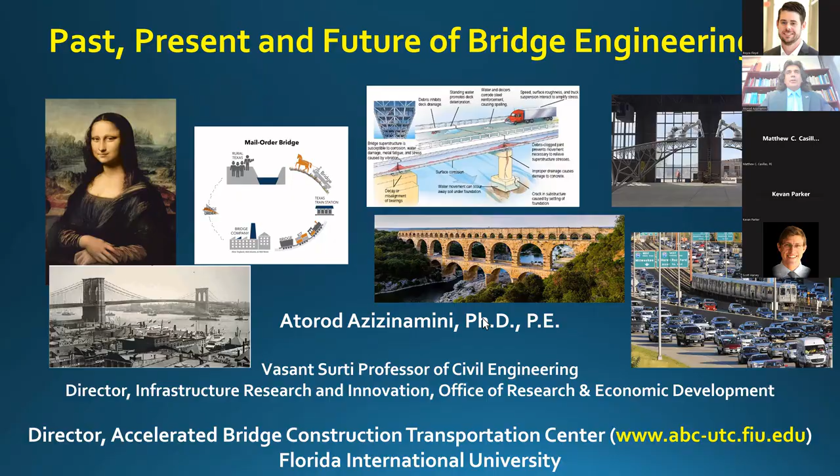Let's go ahead and start. Building bridges goes back many hundreds of years.

Sometimes we say, like the Pont du Gard bridge in southern France, has lasted for centuries, and the thought is that we really did a much better job in the past. But don't forget that for every bridge constructed centuries ago that's still standing, there are thousands that did not stand the test of time.

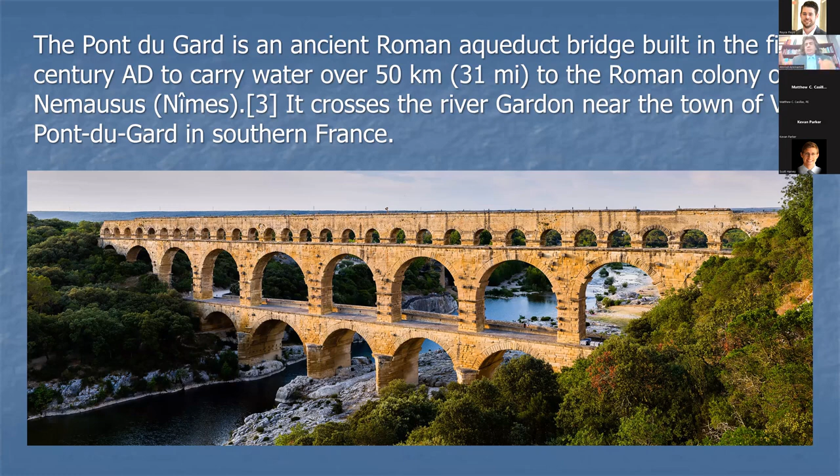Nevertheless, bridge engineering has been fascinating over time, with lots of innovations. I admire the innovation that went into bridge engineering when there was no steel. The arch shape you see was used because at the time there was no material that would take tension, so they had to use an arch because it resists compression. That's why the structures are so massive. You see this same type of structure in old churches in Europe, the Middle East, and elsewhere, because there was no material that would take tension.

I put this slide here, and I'm pretty sure some of you are going to say Atorod is out of his mind - why does he have the painting of the Mona Lisa by Leonardo da Vinci? Well, some of you know Leonardo da Vinci was probably the most famous contemporary figure, one of the first contemporary civil engineers of our time.

I remember I had the opportunity to be in Milan, Italy. If you go to Milan, there's a good museum with the works of Leonardo da Vinci. He was a Renaissance man, and what he did and the inventions he had are really amazing.

He had to make some money, so part of his life he joined in making military equipment, coming up with inventions like a tank you would go inside of and hide in to fight the enemy, and so on. There are so many things credited to him - some say the bicycle was even invented by Leonardo da Vinci, others say no. Many things underwater too, like scuba diving equipment. He has some amazing inventions, but one thing he was for sure was a civil engineer.

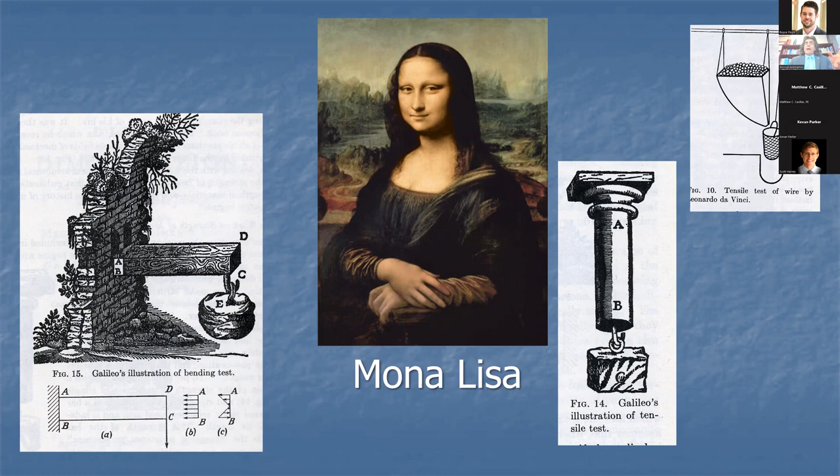Our first civil engineers, when they were inventing something, were always worried about strength. Now, people like John Roebling, who designed the Brooklyn Bridge, were actually thinking about service life too, and I'll mention that. But back then, we really weren't worried about that, and rightfully so - we didn't have heavy traffic and so on. So the early days of bridge engineering didn't have many of the parameters we're concerned with right now.

One thing I should mention is that originally, civil engineers were mainly worried about strength. If you look at the ACI building code, or the AISC building code, there are lots of provisions for strength. And I'm mentioning that because many provisions in our AASHTO LRFD bridge design specification are really rooted in the building codes for steel and concrete. For buildings, strength is fine because every element is protected and you don't have that much of a durability or exposure problem. But in the case of a bridge, it's something else.

One of the reasons it seems like every day we are developing a new AASHTO guide for this or that is because we have taken many items from the ACI and AISC building codes, which are rooted in strength, but durability is what really gives us a hard time - corrosion and so on. Those issues are not really addressed through strength. They should be addressed through life cycle performance, long-term cyclic behavior, exposure to weather elements, and so on.

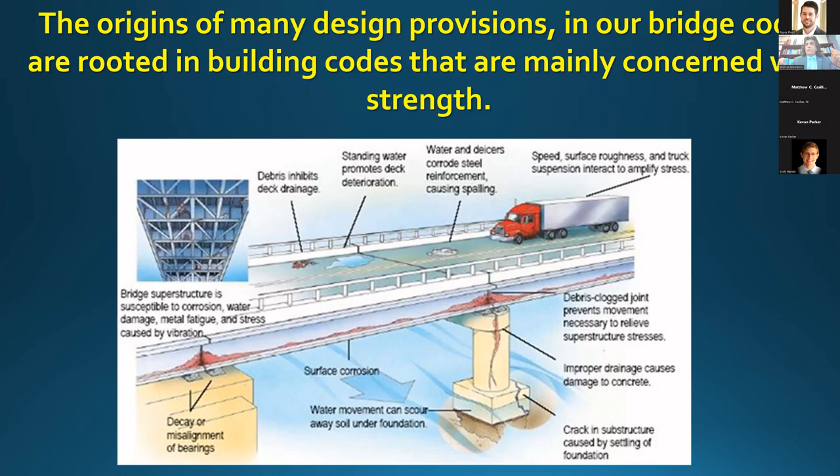But despite all that, there are some bridges that did last more than 100 years. I'm going to show you some of them, and I put the age as well. The Brooklyn Bridge is 140 years old, as of today.

This bridge was designed by John Roebling. Actually he was a very smart guy, and he used graphite to protect the steel cables.

One side comment, one observation as I look at the past, especially in bridge engineering or any other scientific area: you find people who are engineers, mathematicians, philosophers, poets, painters. Look at Leonardo da Vinci - the Mona Lisa painting - but then he also thinks about civil engineering problems. I think as time passes, we've tended to become more specialized in different areas.

But some of the old bridge engineers like John Roebling, who designed the Brooklyn Bridge, were really thinking outside the box. He was thinking ahead - he knew that corrosion would be problematic. So he used graphite, and that protection lasted a very, very long time.

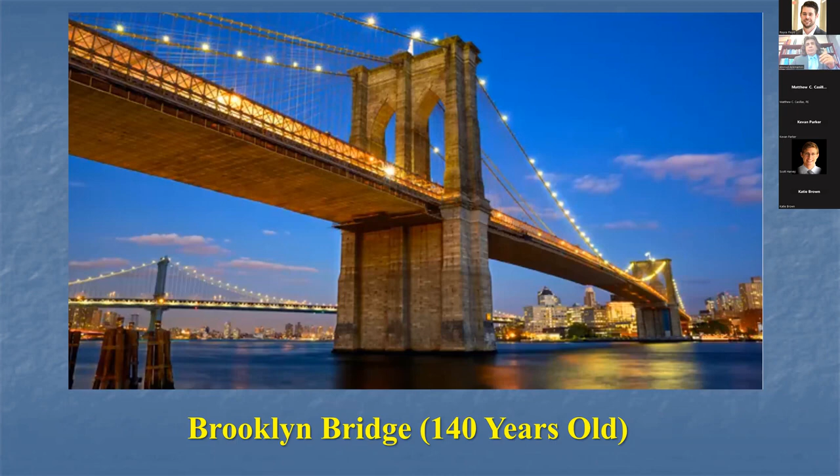The Williamsburg Bridge was not as well maintained, and I believe in 1988 they had to close it. They were trying to decide what to do, and finally in November 1988, after closing it in October, a group got together to decide whether they should replace the Williamsburg Bridge or continue with it. The decision was, because of its historical landmark status, to go ahead with rehab. I believe the major rehab started in 1991.

Now, one item for this bridge that really catches your eye is the fact that these cables were originally designed with a very large factor of safety - if I'm not mistaken, about 5. Over time, the factor of safety decreased, but it was still good enough to serve the type of traffic it has nowadays. That's another lesson: other than maintenance and rehab, it's the very high safety factor that went into the design of bridges like the Williamsburg Bridge, which had a safety factor of 5 for the cables. Over time it decreased to maybe 2.5 or 3, but it's still good enough to meet current criteria.

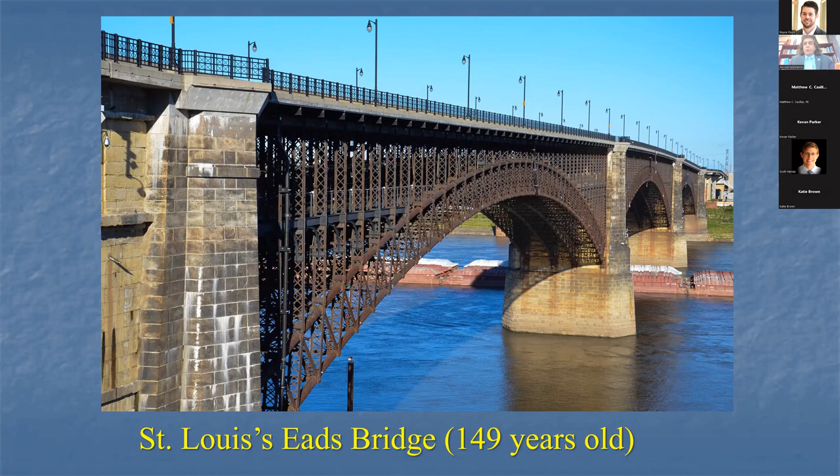I think another reason is the very heavy substructure that you see down here, very stocky. I think that also had something to do with the fact that these bridges have lasted so long. So anyway, we do have bridges that have lasted a long time.

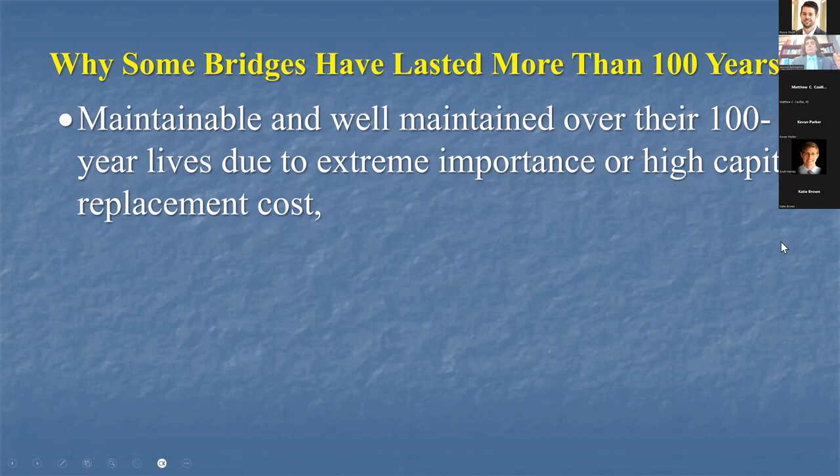But if you look at it, really a couple of things jump out. One is that the reason they've lasted more than 100 years is that they have been maintainable and well maintained over their 100-year service life. It's not without the maintenance. So the maintenance really plays a big role.

The other thing is that it's been adaptable to changing function, use, as well as the service limit state demands, because of basically the size and the weight and so on.

And finally, it was originally over-designed, just like the Williamsburg Bridge that I mentioned, where the safety factor originally for the cable was 5, but then over time it decreased. Now, the designer did not do a good job in protecting the cables. In the case of the Williamsburg Bridge, like the Brooklyn Bridge where John Roebling used graphite, they used some type of oil for the Williamsburg Bridge instead.

But these are really the three main reasons, if you want to identify why some of the bridges we have have lasted 100 years. Those are the reasons, basically.

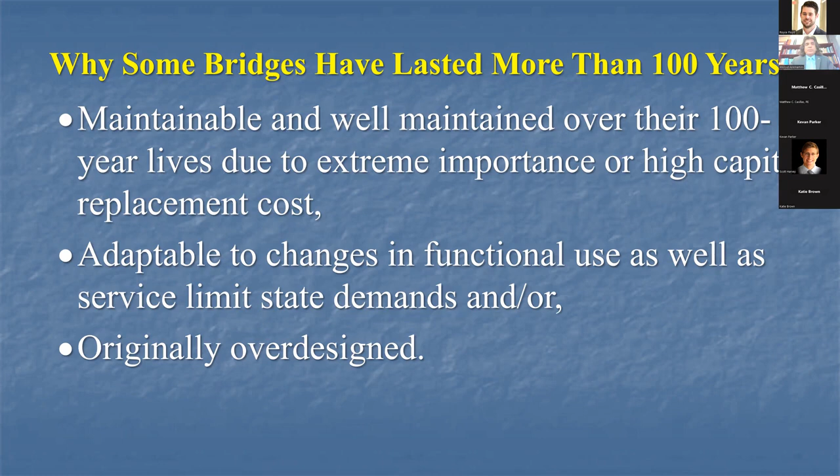The other thing is, in the past, history repeats itself. If you ever think that accelerated bridge construction was invented by us, think twice. I think some of you probably know, back in the old days, before having a proprietary bridge system became a no-no -- I'll elaborate on that in a minute.

Back in the old days, there were salespeople that would go from county to county with catalogs. They would go to these counties and show them pictures of these bridges, and then ask, okay, which bridge do you want? For example, this one right here is out of a catalog.

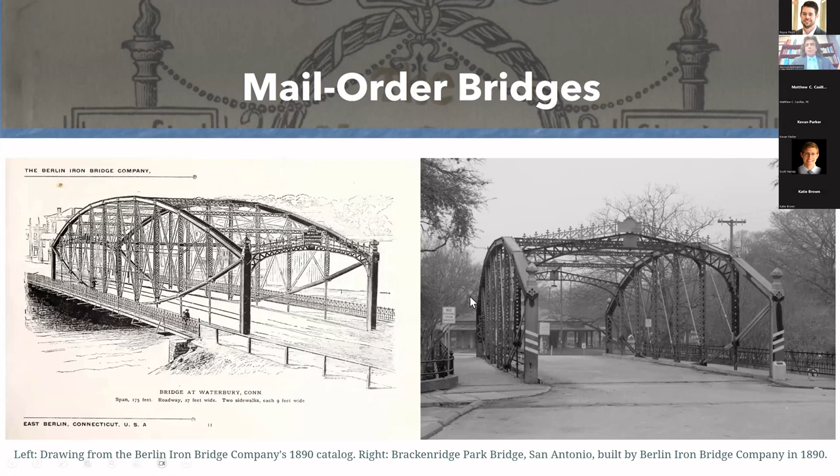I took this from a publication by the Texas DOT, and this is an actual bridge, okay? This is how it worked, basically. The salespeople would come, you would look at the catalog like a Sears catalog, and you would decide what you want.

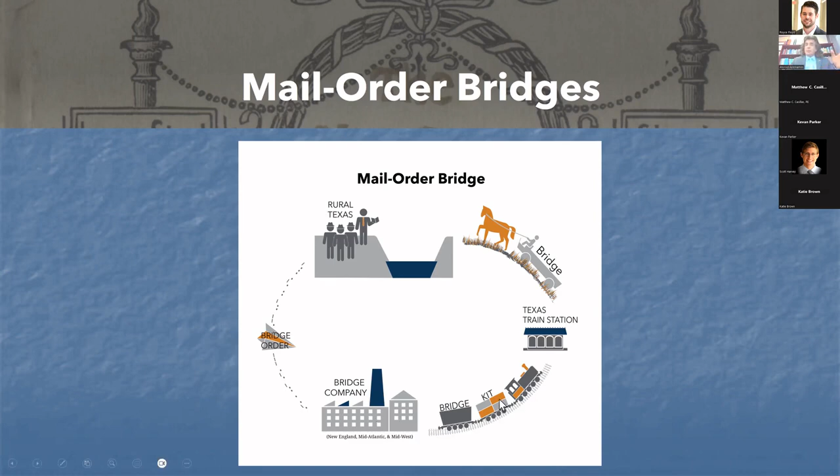They would take your order, go to the company -- there were some companies in Ohio, Pittsburgh, mainly in the Midwest and the East Coast -- and then they would ship the parts and assemble it for you. Here is actually one of the fabrication shops where the bridge elements, the truss, was being fabricated.

One side item really is, if you look at the old history of bridge engineering, you see that there were so many patents issued back then -- Warren Truss, Pratt Truss. These are people who invented these systems, put their name on it, and sold them, and it was not a problem.

I believe there was a law passed in 1975. I don't know what the name of the law was, but I know there was a law passed that really put an end to those innovations. Look at the number of innovations that has gone into the phone system -- today, for example, on a cell phone there might be close to 800 or 900 patents, basically, and that's how it evolves.

Basically, with the patent, there is improvement that comes in and so on. But in the case of the bridge, really, we decided in 1975 that we don't want a proprietary item. That's I think where the innovation really stopped.

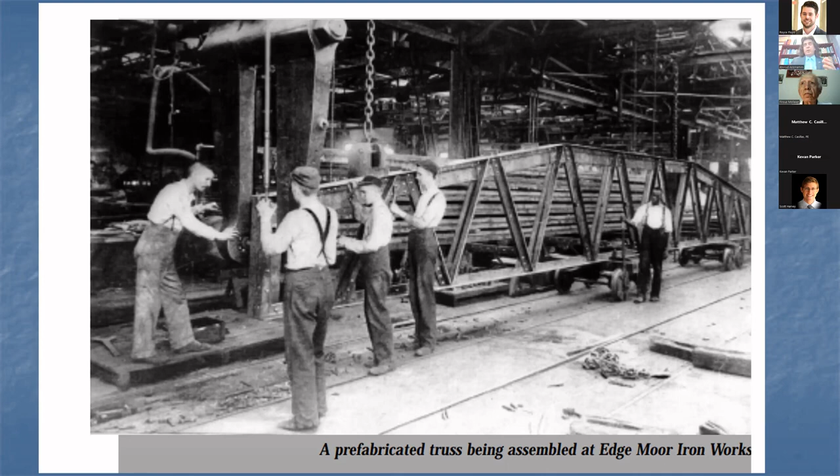And I think innovation, we do need that, especially right now, because so many new technologies are being introduced into our system. Now, back in the old days, of course, we didn't have many challenges that we have right now.

And one of our biggest challenges, I would say, is our existing bridge inventory. If you just look at it, I took this data over the 30-year period from 1975 to 2005, that lifespan. Look at what happened.

During that time period, the population increased by 32%. The number of drivers increased by 63%. The number of vehicles increased by 90%. The miles traveled increased by that much. The weight put on our bridges, the legal ones that we know of, increased 400%. And how many miles did we add to the system? 6%. So that means we are putting more and more demand on our bridges.

The other thing, look at this: in 2010, we have about 607,000 bridges in our inventory. Out of that, by 2010, about 200,000 of them were past their design age of 50.

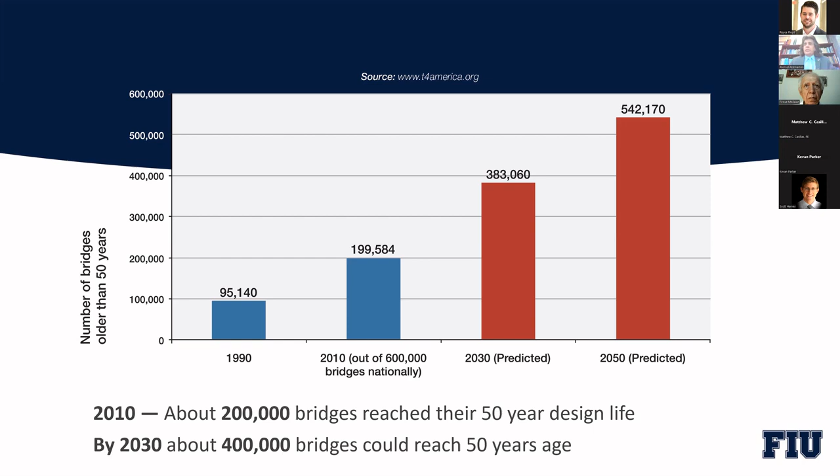Nevertheless, when you exceed the design life, that's a red flag. By 2030, just 7 years from now, 400,000 out of 607,000 bridges that we have are going to exceed their 50-year service life. Now they're going to require replacement. They're going to require rehab.

I think preservation and rehab are going to see more activity in that area because there's no money. Just look right now at the debate on the debt ceiling. In Congress, they're trying to cut spending. So there's going to be less and less money available.

So on one hand, we are facing an increased number of bridges that will require rehabilitation. And on the other hand, we are looking at a massive amount of construction and a lack of money. And if we try to do all this construction business as usual, that is going to be problematic because of safety, interruption to traffic, mobility—all that stuff is a factor.

And this is not just for urban areas or rural areas. If you think construction interrupting traffic is only a big city problem, that's not true. Even in small cities, like Norman—I remember there was Lindsey Street, a 2-lane, very narrow street. If you try to have construction activity there, you'll see what kind of traffic you're going to get. You probably have traffic right now. So these are another challenge.

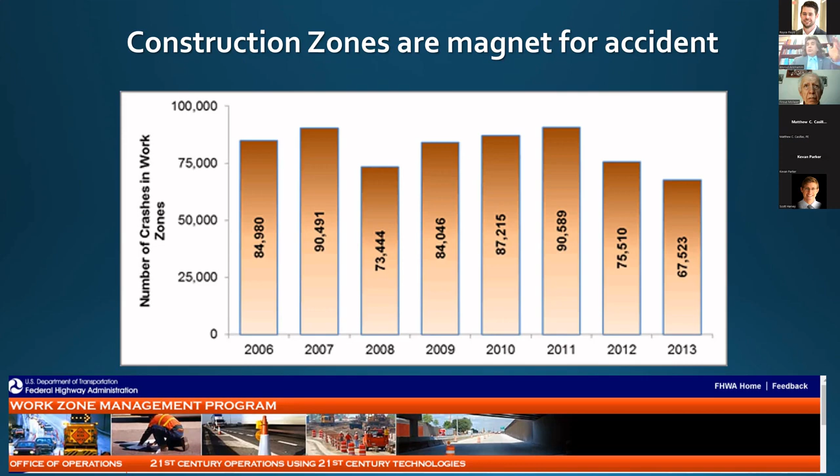You cannot just do business as usual. Of course, the service life and all that stuff—the bridge deck is the number one maintenance problem that we have.

Safety, again, is a big item. If you look at the US DOT strategic plan, the number is basically zero fatality. People assume that means traffic accidents only, but if you have a construction activity, that's a magnet for accidents too. So zero fatality, the number one objective for US DOT, really applies to bridge engineering as well. What that means is if you are aware of a technology or solution that's going to reduce the number of construction days, you've got to use it.

Remember, if you would, please read it one more time. Go to the AASHTO LRFD bridge design specifications, I think chapter 2, section 2.5 or something like that. The first thing that AASHTO LRFD bridge design specification says is that the primary job of a designer is safety. They don't say economy. They don't say you have to develop an economic bridge. It's safety. As bridge engineers, we have to be very mindful of that.

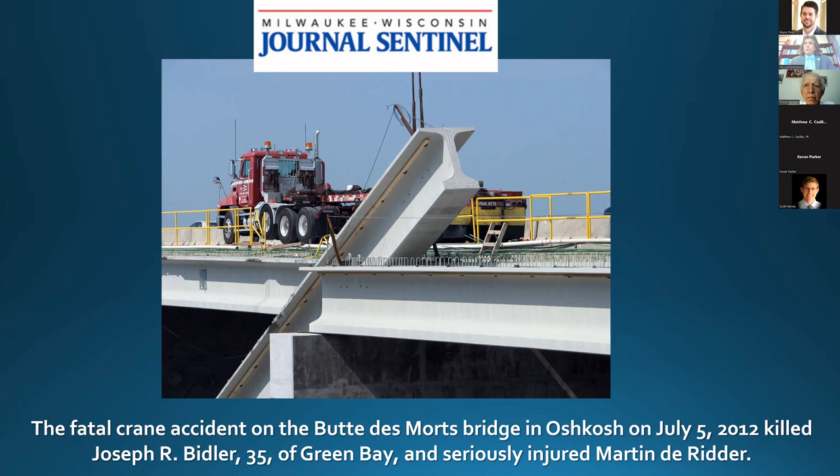And nowadays, fortunately, we are also mindful of service life. Service life is very important. I put this on because back in 2007, we got a project with a very big team, I don't know, 12, 15 co-principal investigators, and I was leading that project. This was one of the strategic highway research program, SHRP 2 projects, and our task was to develop the methodology so that bridges last 100 years plus.

One of the conclusions I had: when I teach a class, I tell my students, if I give you a beam and say I put so much load in the middle of it, supported at 2 and 3 point bending, and give me the stress at the top and bottom fiber, you'll use the MC over I equation. You can plug in the numbers and give me the answer before I know it.

But if I give you the same beam made of concrete and say, okay, I'm going to salt it, let's say once a month during the winter time, and ask when the corrosion is going to start, very few will probably know what to do with it. Or if I have a Teflon sheet for a sliding surface, tell me how long that sliding surface is going to last, when do I need to go back and replace it. I think you'll find out that not many people know what to do with that.

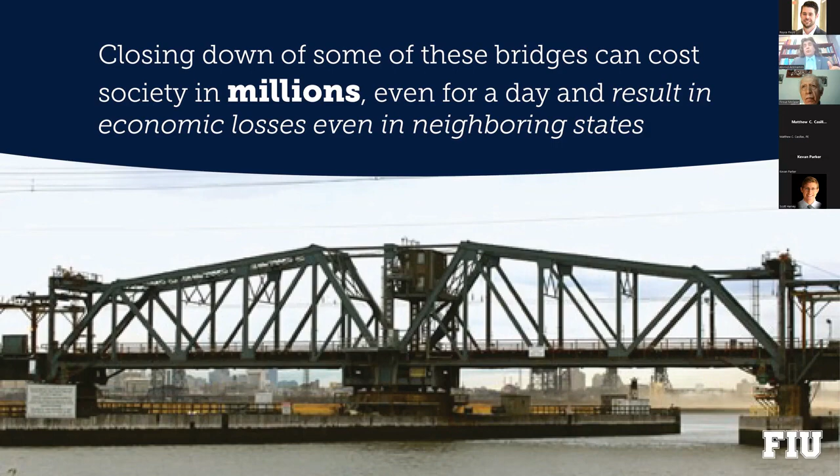But the good news is that we have tools. It's good, but we have to be careful too at the same time. I'm going to show you some of the tools that we have currently.

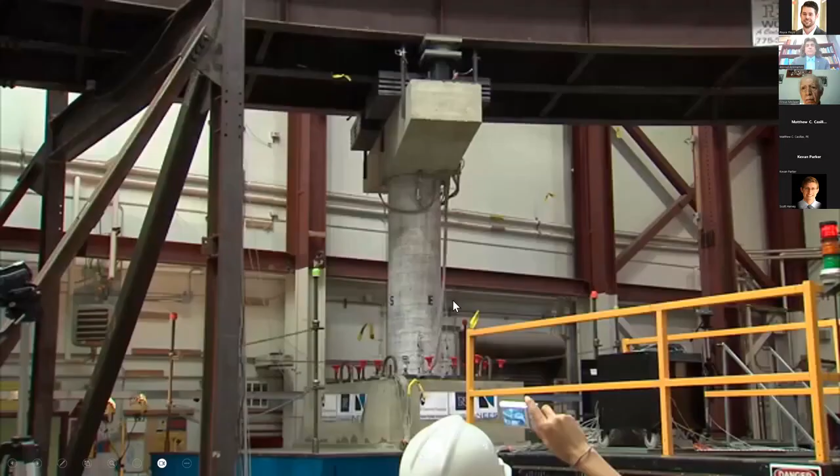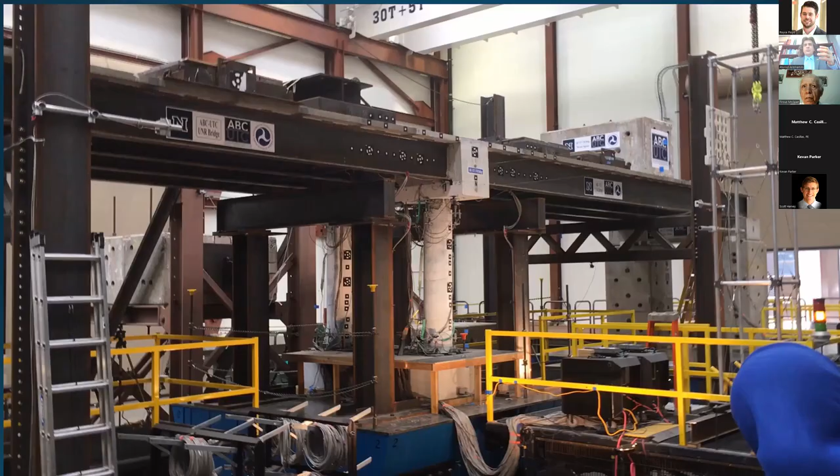We have the capability to really build whatever design concept we have and put it to the test, even for seismic loading. For example, this is a test that was done at the University of Nevada.

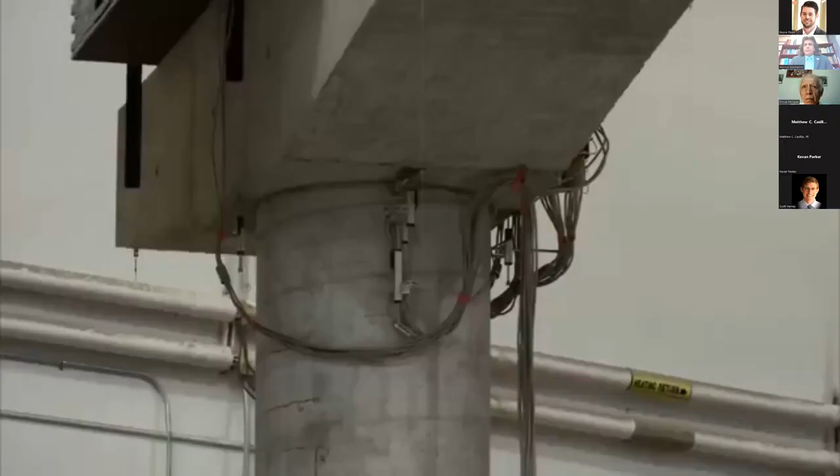So this is a shake table test at the University of Nevada, Reno. This is another shake table test, I think done back in 2018. We came up with the system called Simple for Dead Load, Continuous for Live Load, and then we extended this application to the seismic region, and then we designed the connection, basically how to connect the girders, and finally we did the shake table test for seismic regions.

So we have the tools. This is a 1/3 scale model, and we subjected it to 1.5 times the maximum credible earthquake this bridge would have seen - 2.25 times the design earthquake. Here they are getting ready to test it, at 225% of the design. I believe this used the ground motion, Sylmar, I believe.

So we have the tools. Also, nowadays we have high performance steel, new materials coming to the market, and ultra performance concrete and so on. In fact, there are even more materials. So in our toolbox now we have many tools, advanced materials, ultra performance concrete.

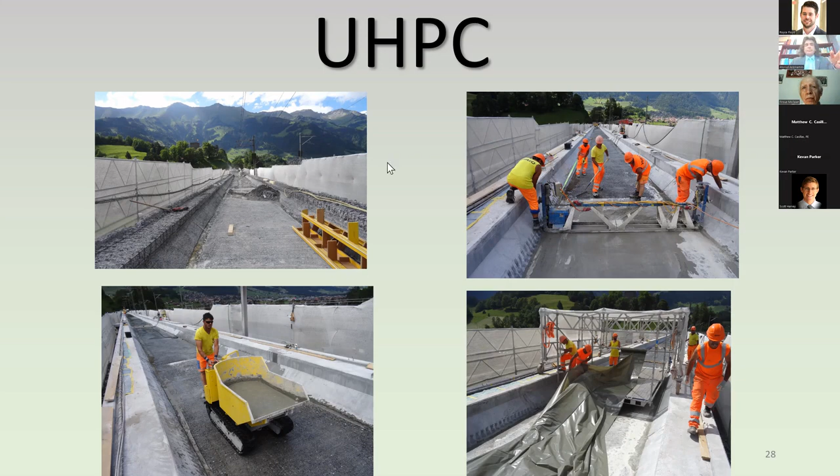So they have taken it - they don't call it rehab, they say upgrade of structures, because when you use ultra performance concrete to wrap a structural element with UHPC, you wind up with a structure that is even better than the original. Not only do you protect it against corrosion, but it also adds significantly to the strength. So these are some examples of it. This is really a wonderful material, I think.

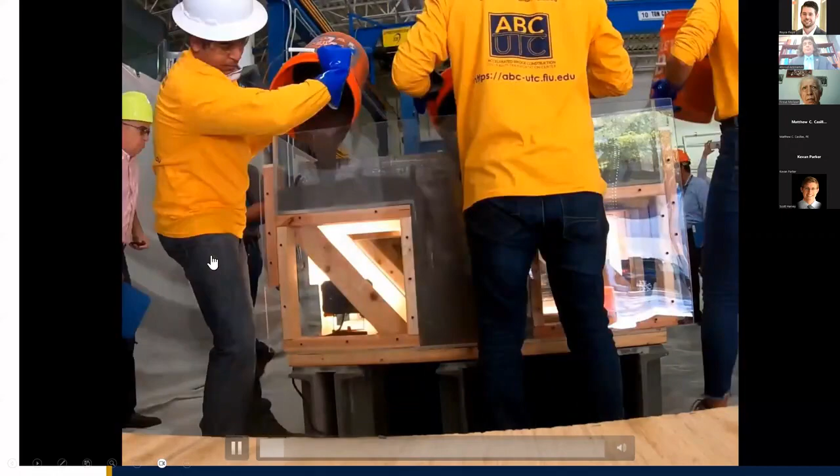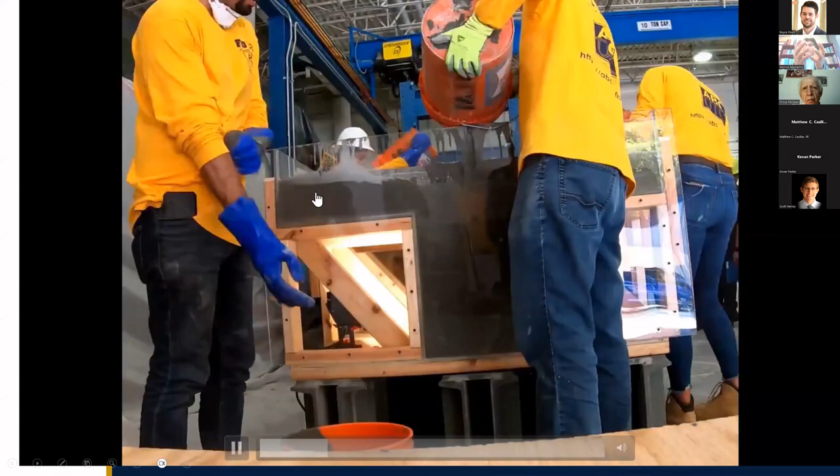This is a test that we did. We actually put a T-beam made of concrete, and then we added some reinforcement. We put it inside a plexiglass formwork because we wanted to see how the UHPC flows around it. And you can see over here how well it is flowing. This is the bottom of the T-beam - see how it's just smooth.

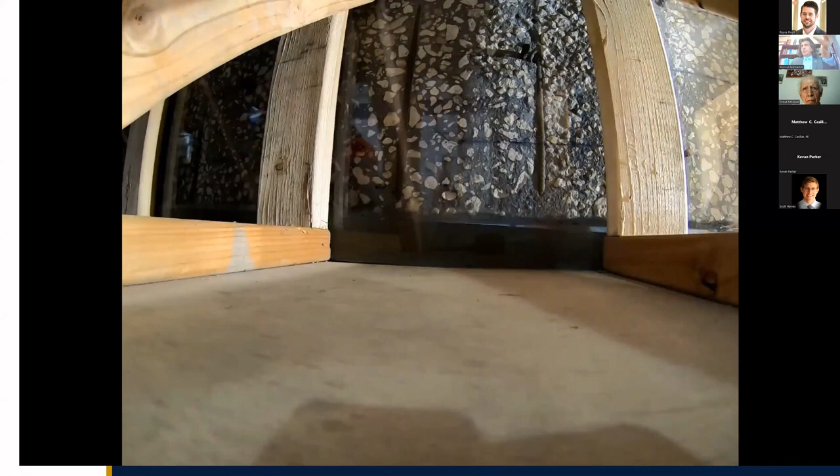In fact, after we removed the plexiglass from this, it was like glass because we used plexiglass for the formwork. This ultra-high performance concrete doesn't have aggregate, flows into very small spaces, 1/2 inch, 1 inch, and you can wrap your deficient bridge elements with the UHPC and get a product that's much better than the original.

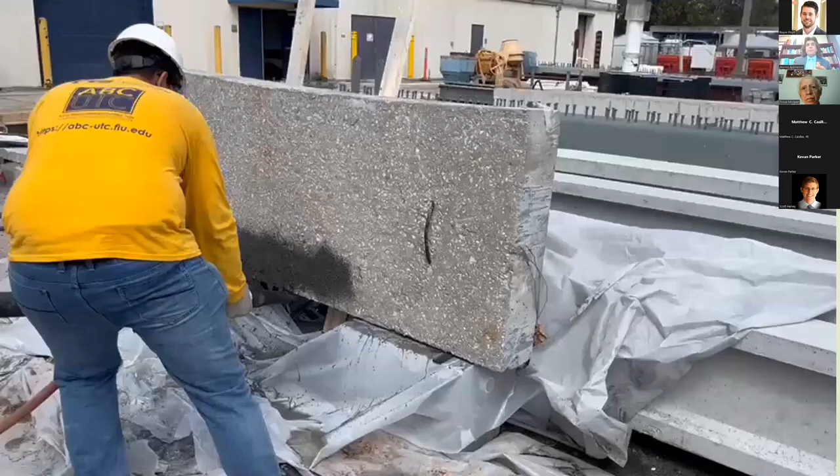Or nowadays, for example, we are using shotcrete. So you guys are familiar with shotcrete. This is one of the experiments that we did at ABC-UTC. Basically, with the hose, you just spray it.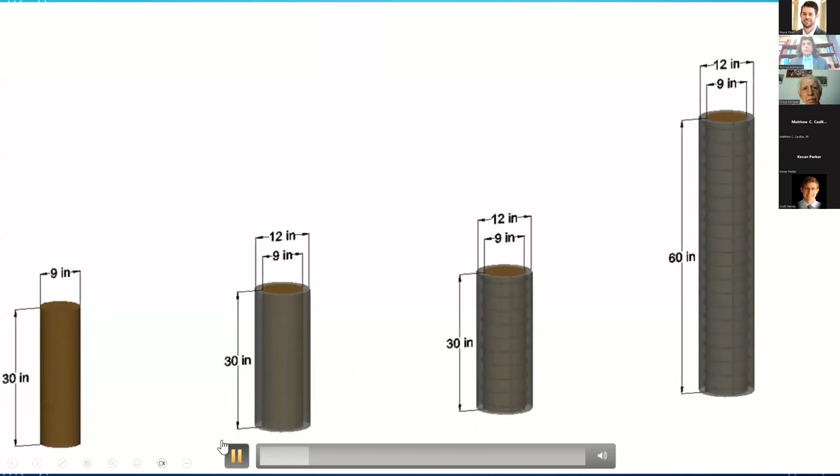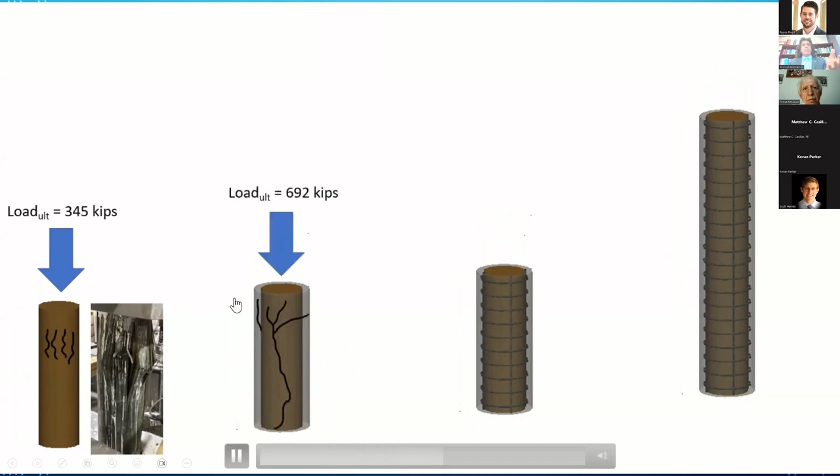We have developed techniques for timber piles. What we are doing now is much more involved than this, but for example, a timber pile that has 345 kips capacity, we wrap it in a very thin layer of UHPC, and all of a sudden we go to 600, 700 kips capacity. If we add a little bit of steel in there too. So we've got these kinds of tools.

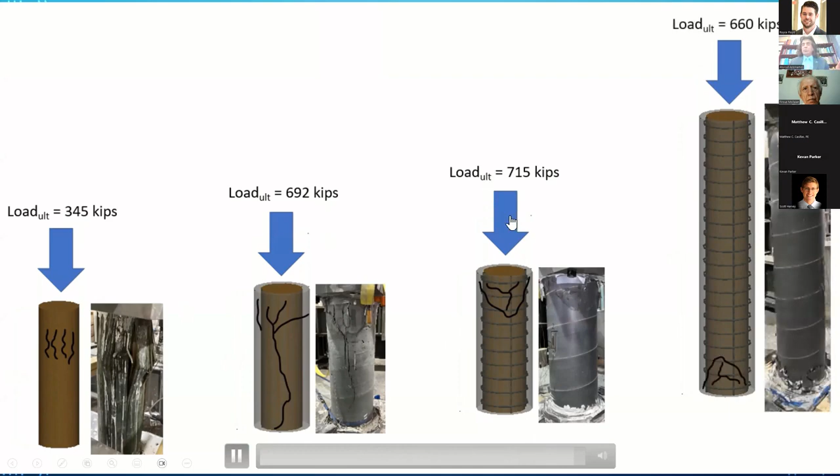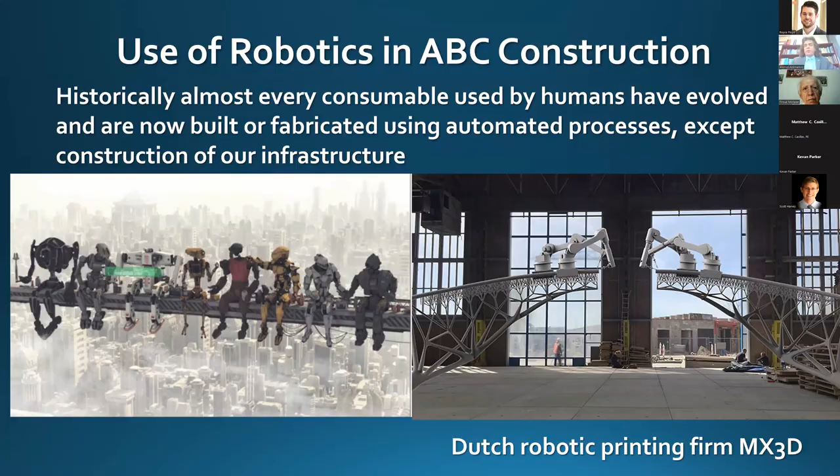And on top of that, right now you see, for example, robotic construction. Robotic construction is really coming up quite well right now. This is just to show you, for example, the column you see on the right-hand side, it's printed by the printer. It's a hollow column - if you look at the inside, it's this.

Now let me show you the printer. This is the printer, comes from the top. Now this is a simple shape. We are now at the point that we can print almost any shape you want. This is actually one of the simpler ones.

So if you have a bridge that has several hundred columns that you want to use, you can print these columns 24 hours a day, and printers don't ask for overtime. So you've got this kind of technology that is coming. This technology is at its infancy, but I think over the next decade or so you're going to see more widespread use of it.

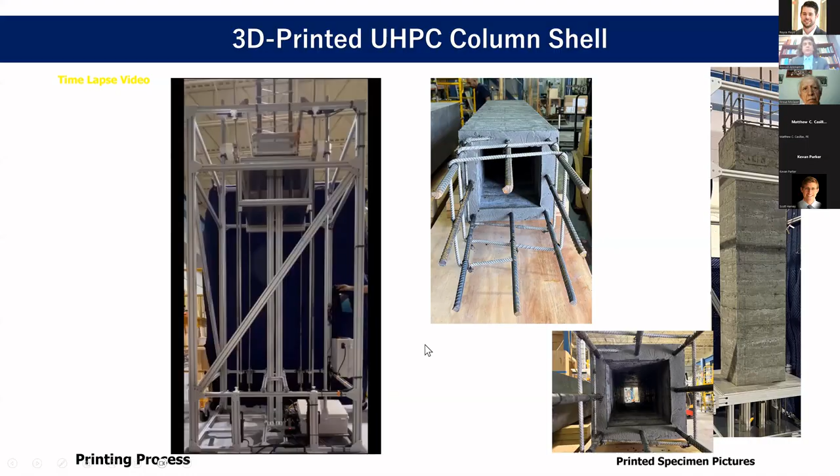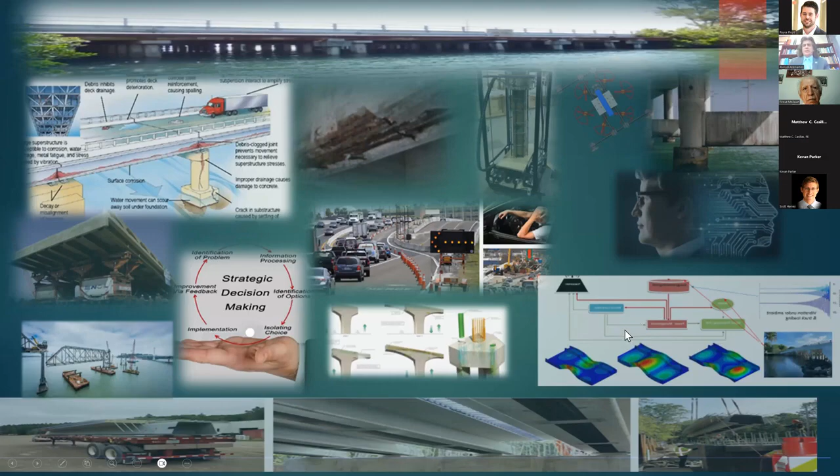So in summary, we have many different types of technology with respect to the analysis and so on that we can use, and we need to take advantage of it. In this slide, I said, you know, we have all these challenges: the durability challenges, dealing with the construction - basically the first column - the mobility issues that causes, and the safety problems.

Now, there is also, trying to see the best way to move forward, some of the disruptive technologies coming on board that we don't know the impact of. For example, autonomous cars - if everything flows in an autonomous way, maybe you don't need 6-lane, 8-lane highways anymore. If trucks can go in one lane in certain locations, you don't need as much width, but you need maybe a much stronger beam element.

Drones, I just put it over here. If you go and Google, there are a couple of companies you can actually buy shares of that are developing a drone taxi that you can take from point A to point B. Don't be surprised. Now, this isn't going to solve all our problems - maybe they can address 10, 15% of the traffic problems. For example, if you want to go in New York, from one airport to another. So there's some technology that's coming.

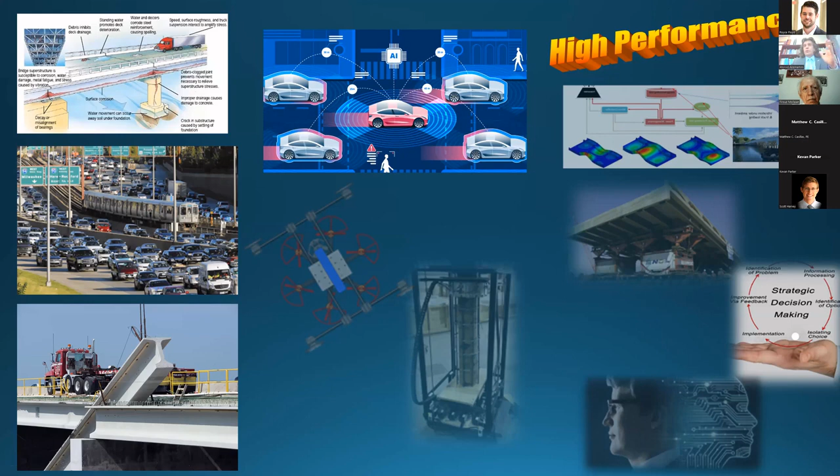And then, of course, there's lots of technology coming - artificial intelligence, advanced sensors, monitoring, advanced construction like accelerated bridge construction, things like that. So these are the tools we have on the right-hand side. The middle one is the unknown disruptive factors, technologies being introduced on a daily basis into our bridge system. On the left side, we have the problems we have to deal with. So we have to put all these things together in envisioning what we are trying to do.

The other thing that I think is important: in February 2023, we were selected by US DOT to have a University Transportation Center devoted to bringing the latest technology into bridge engineering and making sure that bridge engineering in the US is absolutely number one. This is the Innovative Bridge Technology / Accelerated Bridge Construction University Transportation Center, IBT/ABC-UTC. University of Oklahoma is, I'm very proud to say, one of our partner universities in the IBT/ABC-UTC.

So we are going to be working more with the folks at OU, with Musharraf and Royce and other faculty. Hopefully they will invite me on a Saturday when Oklahoma has a game, so I can visit my Sooners Nation.

One of the things I think we are going to be undertaking is developing the next generation of the bridge asset management system. There are companies right now in Europe doing some limited work in the area of advanced methods of assessing and evaluating bridges. We need the next generation of the bridge asset management system that incorporates new technologies like artificial intelligence, advanced sensoring methods, and advanced decision-making processes. So those are some of the technologies that need to be incorporated.

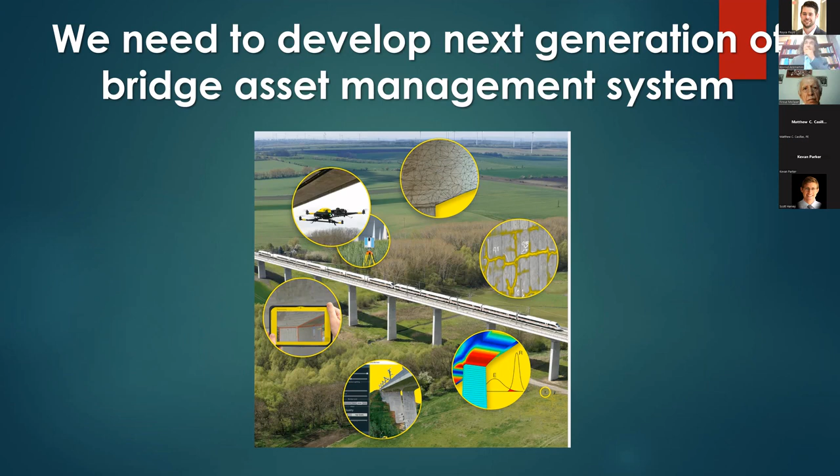As a side note, just a few days ago I gave a presentation at the AASHTO COBS meeting in Kansas City, and I told them that at IBT, our new University Transportation Center, we are going to be looking at developing the next generation of the bridge asset management system. At this point we are collecting anyone who would like to be a member of the ad hoc advisory research panel for this project, to send me an email. My email is very simple: aazizina@fiu.edu. The individuals who would like to work with us need to have significant responsibility with respect to the asset management system.

Nevertheless, it's going to take us probably 4 or 5 years to get the first version that includes all the technologies you can think of. And I would also like to leave you with this thought.

Take a look at the AASHTO design specifications. We had the allowable stress design, right? Then the Canadians, really in the 70s, came up with the load resistance factor design. In the 80s, a group of engineers gathered in the US and said it's time for us to develop a load resistance factor design specification. It took really about 20 years before the AASHTO LRFD bridge design specification became well accepted with all the state DOTs, little by little. But it was a step forward. And the standard specification, which is allowable stress design, is no longer maintained, and nobody is using it anymore.

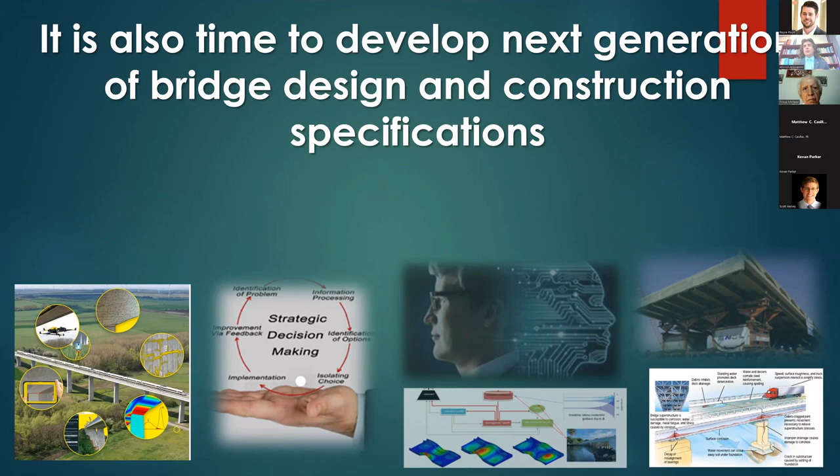That's why I think the people who lead this effort will be remembered for generations to come, as the pioneers who started an initiative that really changed our bridge engineering practice. I hope among those of you listening today, there is someone who will initiate that thought process.

The other thing I'd like to mention, if you haven't looked at it, there's a document called the USDOT Research, Development, and Technology Strategic Plan, 2022-2026. Google it and take a look - there are many new ideas. USDOT is looking at the future of bridge engineering completely differently than what we have nowadays.

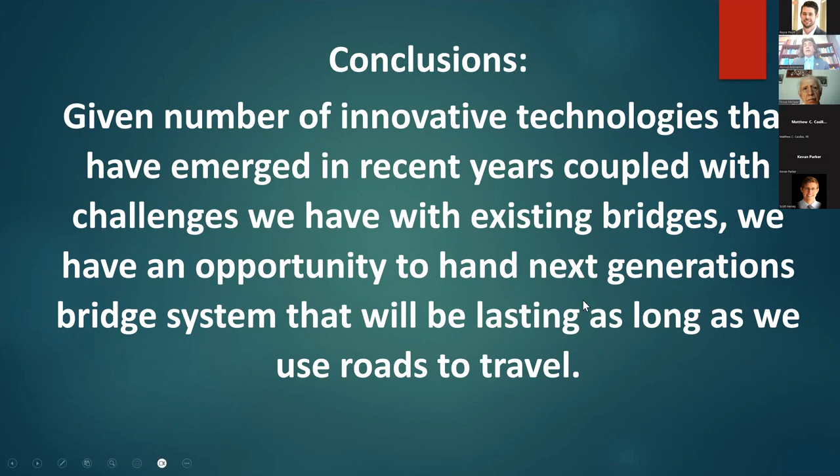So in conclusion - this is my last slide, I hope I didn't bore you to death - given the number of innovative technologies that have emerged in recent years, coupled with the challenges we have with existing bridges, we have an opportunity to hand the next generation a bridge system that will last as long as we use roads to travel. I don't know how long that will be - maybe like in Star Trek, we'll be beaming people from point A to point B, I don't know about that future. But nevertheless, we have the opportunity, we have the technology, we just have to take advantage of it. With that, I'd like to conclude my presentation.

All right, thank you, Atorod, for that interesting presentation, taking us back through history to the future that might be much different than what we have today. I did mean to say that you were an OU alum and mention your love for OU football, but our technical difficulties threw me off a little bit there.